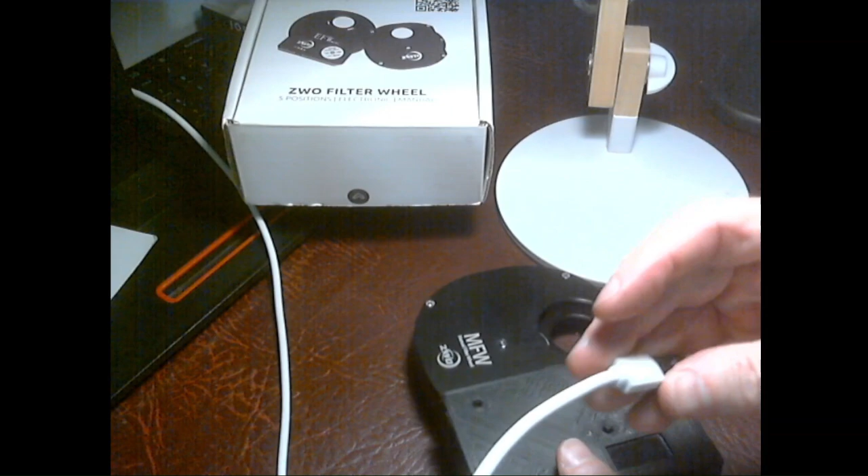So without connecting it to ASCOM, we're just going to stick a 5-volt supply in there, and what it will do is it will go into calibration mode in the first instance, locate that magnet, rotate 360 degrees round the wheel to work out how many steps there are in a revolution, and then go to a filter position. So if I plug that in, you'll see it immediately says finding magnet, and the wheel starts rotating.

And we should see here the magnet coming into view any second now. There it is. So there's the magnet, and this will find the magnet. Oh, it's already found it, sorry, but it's finding it again to calculate the steps per revolution, and then going back into the filter wheel position.

Once it's done that, we can just press one of these buttons, and you can see at the moment it says parked filter 4, brackets 4. So that's saying that it's in position 4, that's the bracket 4, and that filter is called filter 4, rather dully. And then we can press the minus to go back, so filter 4 to filter 3. We're now in position 3 on filter 3. Or we can go plus and go back to filter 4, and so forth.

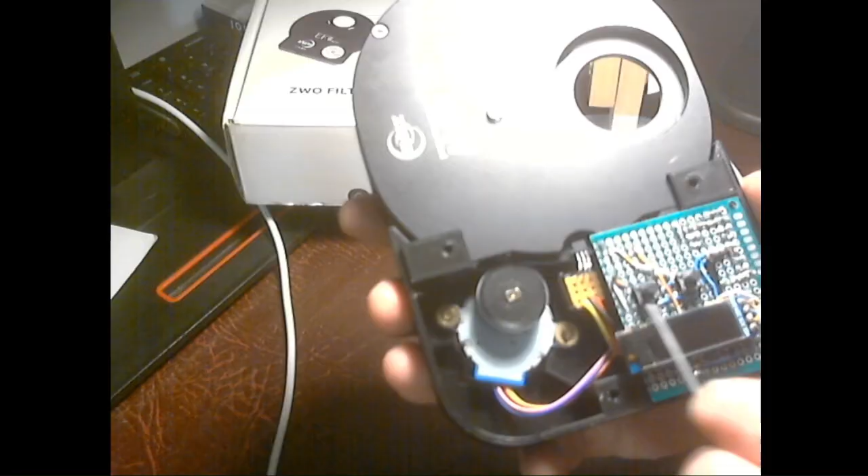and then if we take that off, you can now see the components inside. So you've got the stepper motor here, you've got a 3D printed driver wheel on there, and on that wheel there's a rubber band. I just happen to have a suitable rubber band in a drawer. My partner saves every rubber band we get from parcels, and lucky she does, because that was perfect.

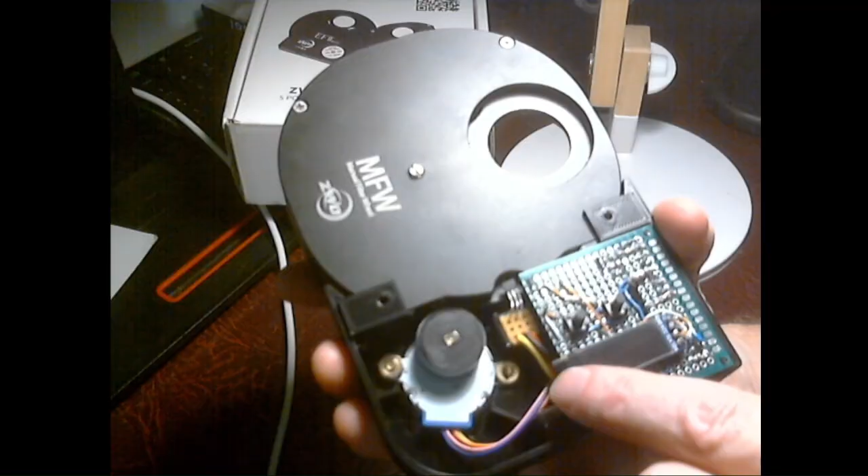And we've got the circuit board here on a little bit of donut board, I think they call that, with the OLED screen. I've kept the information on the LED screen pretty basic, large font. This is your filter. You're on. This is where you're moving to and from. That's the way I like it, because it's nice and simple, easy to see. And what else do you need from a filter wheel? And then you've got buttons here, obviously, to go left and right that we were using before.

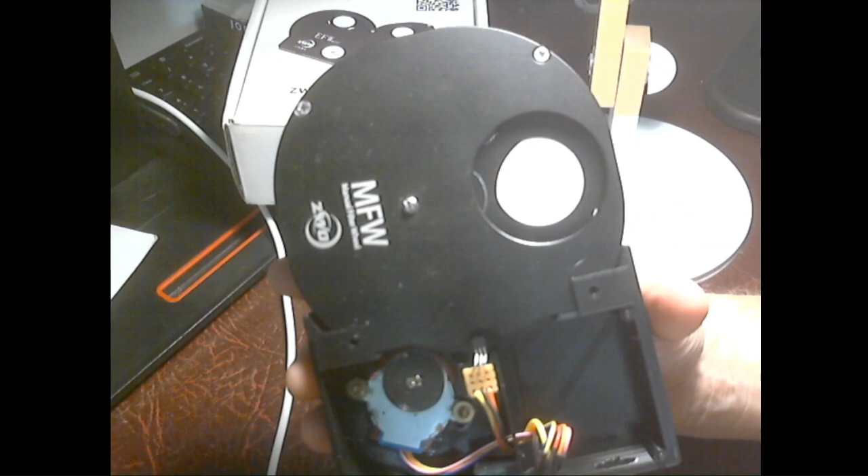That just sits on the top there, and you can see underneath we've got the cables going through to the stepper motor and to this Hall effect sensor here, which is the component that's detecting this neodymium magnet. I drilled a hole in the side, as it was the same design as the one that's already up on YouTube with a little magnet on the side.

I recently bought a bunch of tools from an auction site, and amongst those were some center drills, which are kind of big, thick drills, and they're perfect for this. They drilled a really nice, neat hole for that magnet.

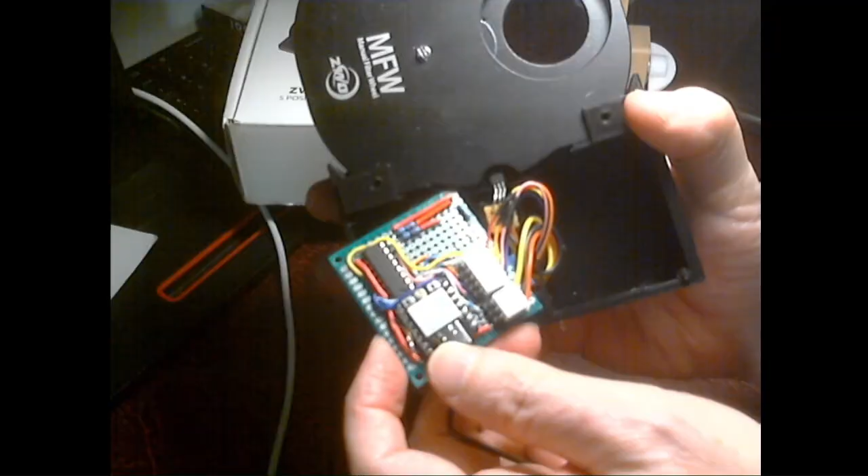Right, and then on the back of the board, you can see it there. You've got this microcontroller here. I don't know if you're going to be able to see that. It's a Seeeduino XIAO controller, and it's an Arduino type controller.

And then we've got the stepper motor driver integrated circuit there, and not much else really. A few resistors. I think there's a small capacitor there somewhere as well, and yeah, it's a pretty straightforward circuit, and I'll describe the circuit next up, and I'll take you through the 3D printed components.

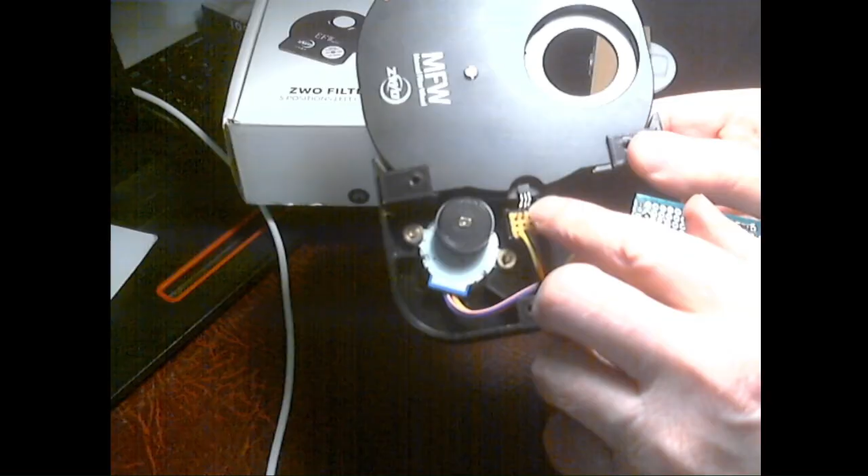So if we just plug that in again, you'll get a view of what's going on from the inside, so to speak. And here we go. So it's rotating around. This Hall effect sensor is looking for the magnet. And you can see it's finding magnet at the moment. Here comes the magnet now. And as soon as it goes past that magnet, you can see it's now changed to calculating steps per revolution. So we're looking for the magnet again.

I might just do a little change to the script to calibrate in both directions, which I think the original project had, just in case there's a slight difference. I'm not sure if I detect a little bit of creep in one direction if you go step to step and just keep going in that direction.

But we do take the opportunity here, whenever this magnet goes past the Hall sensor, no matter how long you've been using it, from one filter to the other, to recalibrate it, because we now know in relation to everything else where that magnet is on the wheel. And if it goes past the magnet and it thinks it's at position 10, when it knows the magnet's at position 0, it'll reset itself to position 0. So it will recalibrate.

And another little tweak I might do is to say, okay, let's do a maximum of five moves between filters without going past the magnet. Of course you might go past the magnet anyway, in which case that's fine, it resets your count. But if you're on your fourth move and you still haven't gone back past the magnet, maybe on the fifth one, force it to go past the magnet, even if that's the longer way to the filter, to make sure that it gets recalibrated every now and again.

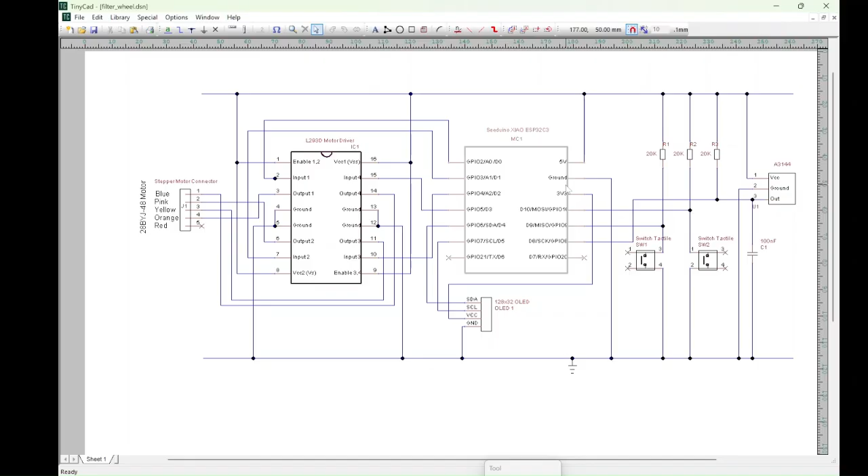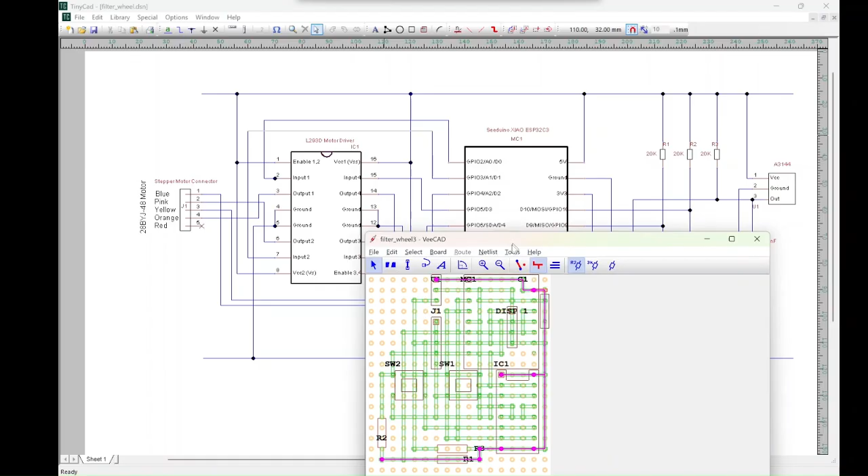So here are the ground connections. And if we look at this one, that's the 5 volt supply, and you can use this to see how things are connected up. I'll include it, but just be very careful how you use this so you really understand, when you're wiring up on the board, how it relates to this circuit diagram here. It's a fairly simple circuit, so as you're putting things on the board, you should be able to see fairly clearly what needs to be connected up.

That's about it. I mean, just to be clear on the driver, whenever one of these pins is high, say input 3 here, set that high, it means that we then take the voltage from VCC2, and it's output through 3. So input 3 high, then output 3 is high.

But it could be at a higher voltage. These things are designed to, say, take a signal voltage of 3.3 volts, and it could be 12 volts being supplied through VCC2. In our case, it's 5.

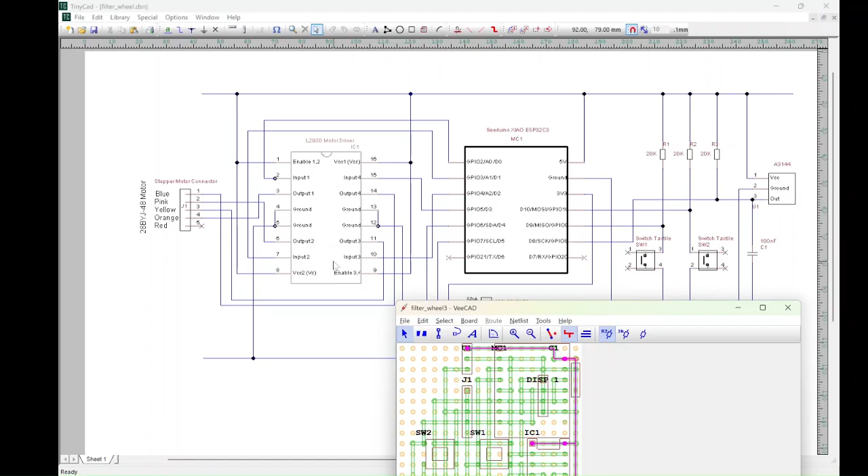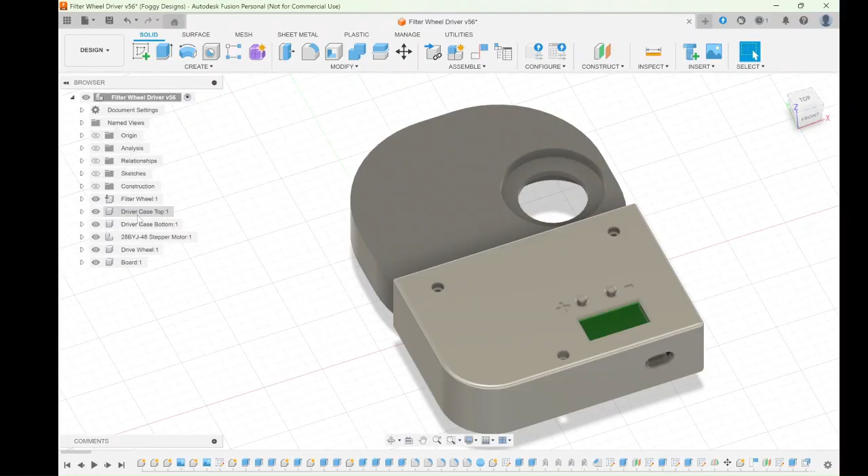So what I did to begin with is to mock up the filter wheel itself. So if I take out all these other components, you can see here I've got the filter wheel at roughly the right dimension. I've got as good as I could get. Most importantly, these holes here are the right distance apart, and the wheel here is the right distance. So I could start to build everything around this.

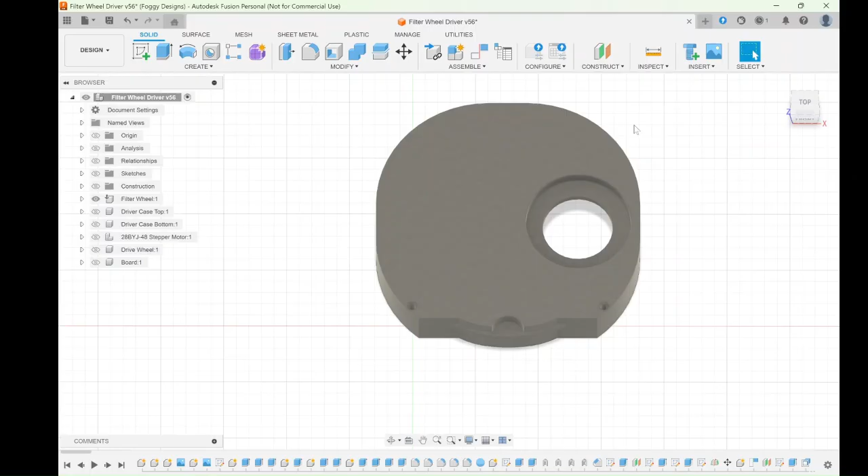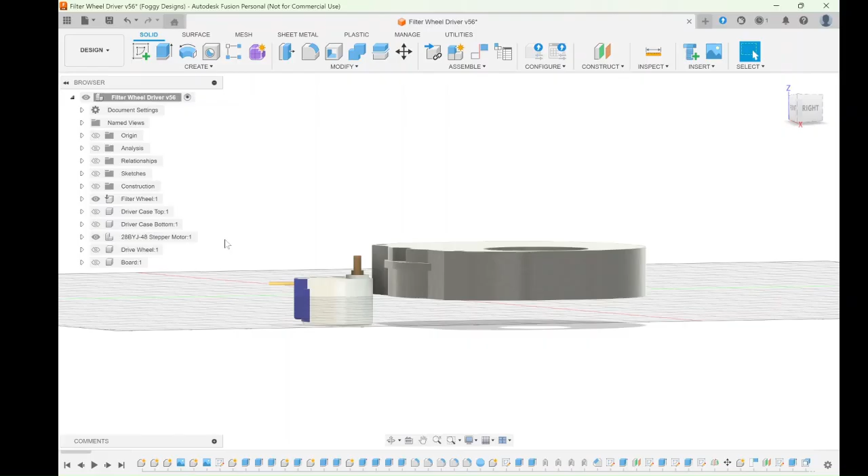I looked on the public sites for Fusion 360 objects and came across the model for the 28BYJ-48 stepper motor, so I didn't have to do that. I just imported it, and I positioned that in the right place, so that when we put a little wheel on top of that stepper motor, which we will print, where's the wheel? Here we go. The wheel now is coming up against the wheel of the filter wheel.

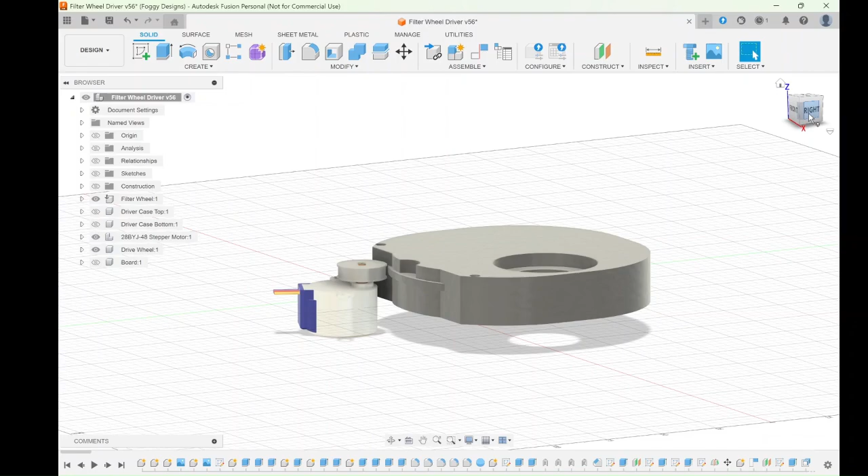There'll be a rubber band around this driver wheel here, and then that in turn will be mounted on the bottom of the box, which is the main component. So if I put that bottom of the case in, let's bring this up. You can see that the stepper motor sits on a couple of platforms there. There's a bolt that goes through this section here, and then there's a slot here, so you can just move that wheel in and out to get the right pressure against the filter wheel to drive it.

There's a platform here to hold the Hall sensor. I've got a little tiny Veroboard, so it sits on this ledge, and there's a little bit of a cutaway beneath it to accommodate the solder blobs on the bottom and the cut-off wires. And then the board itself sits on the top here.

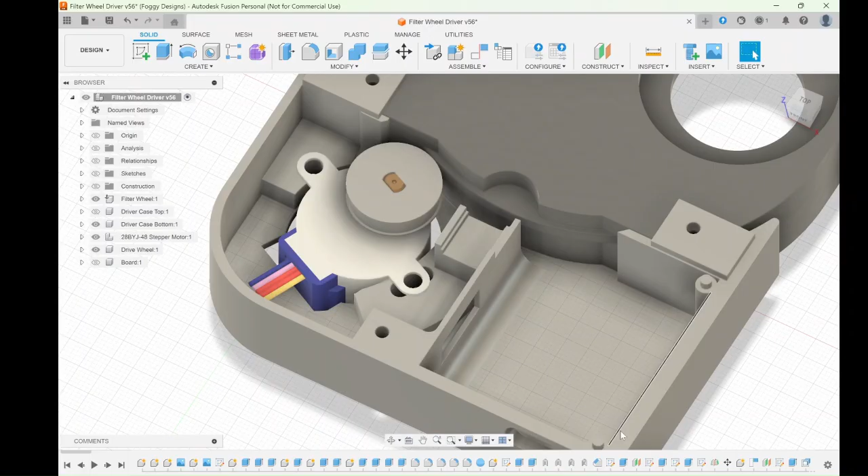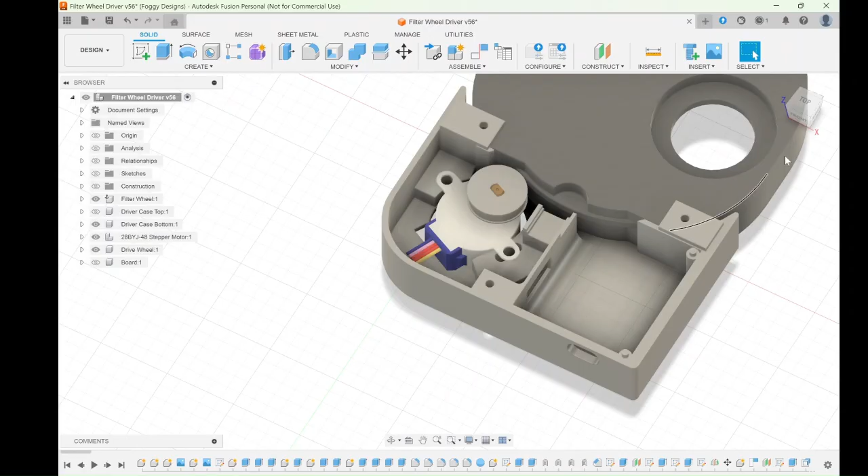They've got a couple of lugs that fit through the holes in the donut board, and you can see the whole thing is secured on the filter wheel via these tabs which go across the top, through which you'll put screws directly into the filter wheel, and on the bottom it overlaps the filter wheel there.

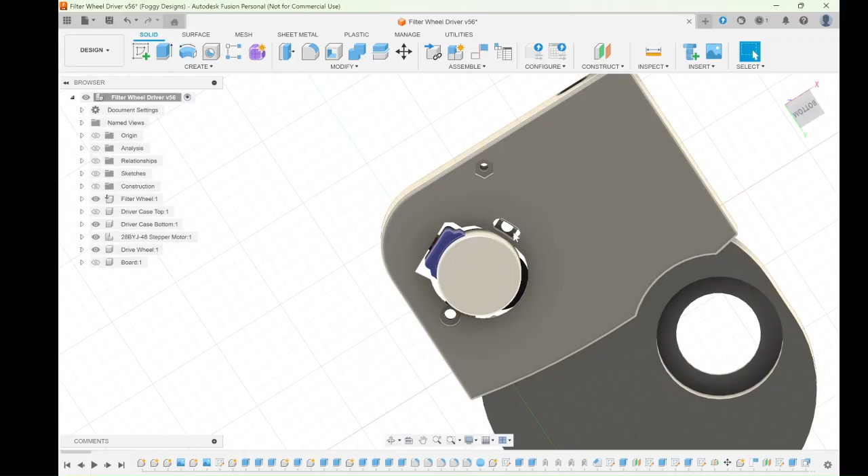And there you can see where the bolts come through the bottom of the case. I recessed the hole for the bolt here to take the head of the bolt, but I didn't here because it was a slot. If I put a recess, it was quite a big cutaway, so I left that so the head of that bolt will protrude, but the whole stepper motor protrudes anyway. So that's the bottom of the case.

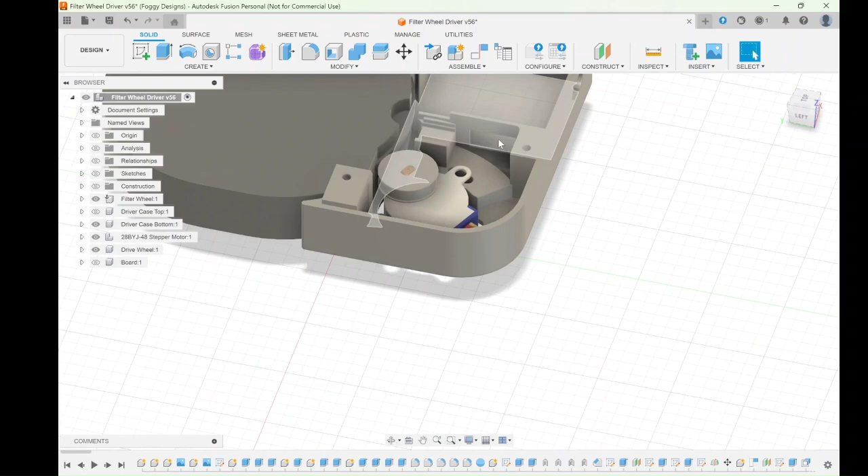There's a hole there for the USB cable to plug in. There's a window there through the side of this wall for the cables to come through for the stepper motor and the Hall effect sensor. And then we have the board which sits on top. So I've got a mock-up of that. You can see the buttons there on the screen. And that just sits on top, and as you can see, the lugs from that bottom of the case just fit through the board there.

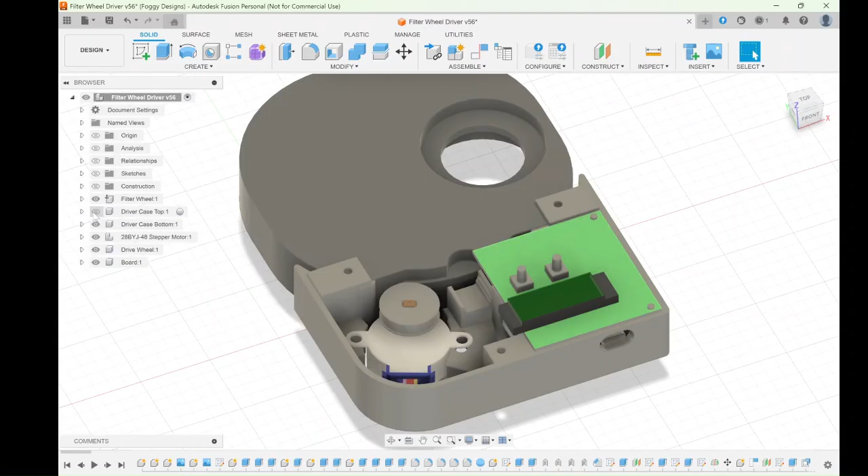And then on top of that, we then have a driver case top, and that just fits on there. And then we've got the bolts which will go through the top of the case, through the lugs on the bottom of the case, and then screw into the filter wheel.

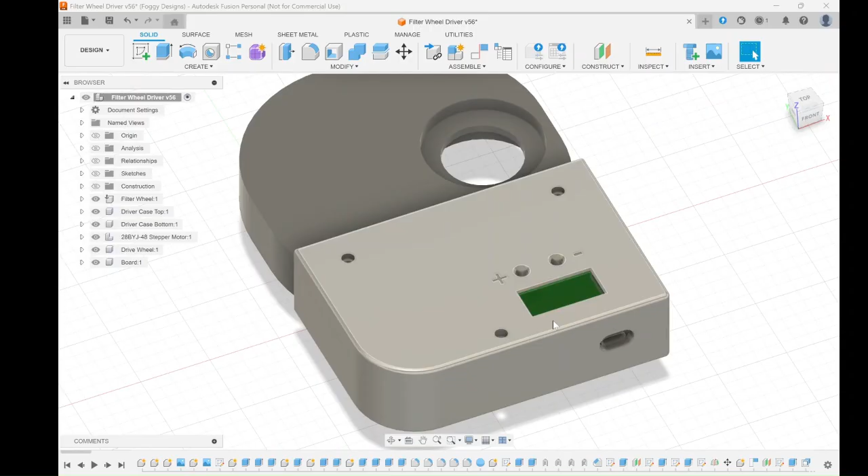And then there's another bolt which goes through here just to secure the bottom and top of the case. And you've got the window for the OLED and the two holes there for the buttons. And that's it. So as I say, I'll put the Fusion 360 export files up on GitHub, and I'll also put the STL files for the components that you need to print, which are the top of the case, bottom of the case, and the wheel that sits on the stepper motor.

As I say, that fits the board that I put together for this. It may not fit yours, so you may want to come in and tweak this a bit, or try and get the board exactly the same dimensions as mine.

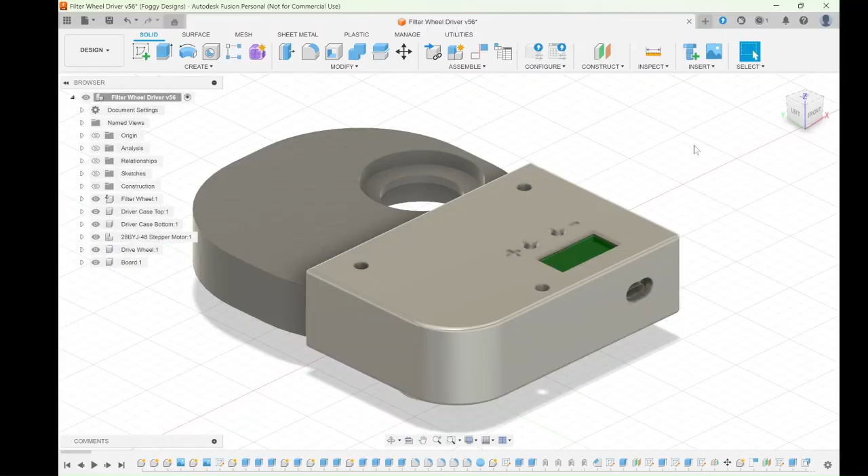Okay, we're going to talk about the software used to drive the filter wheel and to implement the ASCOM driver so that we can then manipulate this filter wheel via astronomy software that's ASCOM compliant. The hardware itself is driven by an Arduino script. I use the Arduino IDE here. There are other options available.

There's a Visual Studio extension which I did download and install, but it took me so long to get round to having a play with it that I found the trial period had run out. So I can't really say how good that is. And to be honest, for what I use it for, I suspect the Arduino IDE is enough. There's also a product called PlatformIO, which you can use with VS Code.

I've uploaded 3 different scripts. There's a tester 2, who knows what happened to tester 1. There's a magnet locator and the main driver itself. So tester 2 will just drive the stepper motor a bit backwards and forwards, use the buttons, will detect a magnet with the Hall effect sensor and print a message to the screen. And it's really just to test that you've got things wired up correctly. Even if it's just on the breadboard, you can use the tester 2 script just to test for the basic functionality.

One of the things I really had a bit of a job getting right was the driving of the stepper motor, and that will test that part of the development. And then there's a second script called FW Magnet Offset Calibrator.

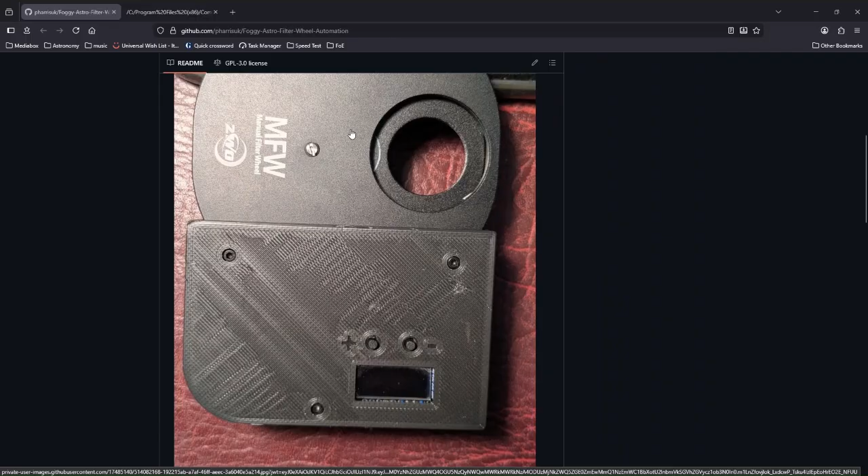As I say, when you install the driver, it will point you to the GitHub site, and this is where I've uploaded all the files for this project. So we've got the main project here, which has got the design for the case. It's got the circuit diagram here. We've got files for TinyCAD and a netlist and VeeCAD layout, which is a little tricky to use. We've got the main components used in that circuit, and then we've got the Fusion 360 design.

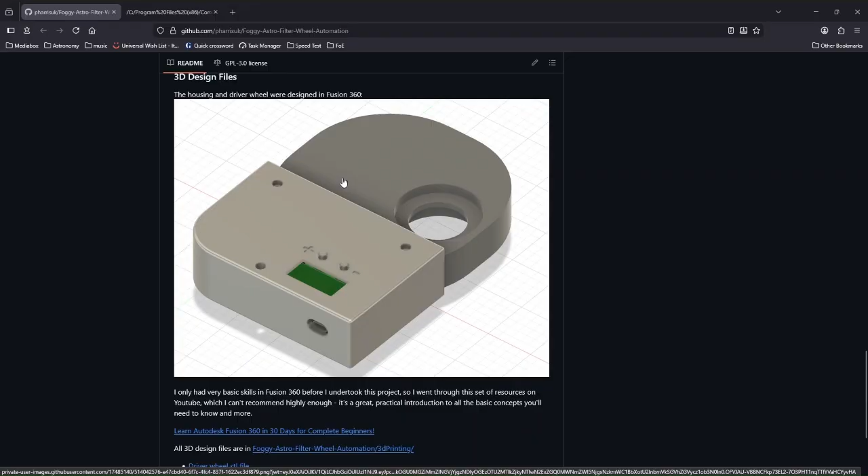But we've got the STL files if you just want to print those out, and they're suitable for the board that you're installing. And then we've also got the Fusion 360 export should you want to go in and alter that Fusion 360 design yourself. Inevitably, when I finished that design, there was a fair bit of tweaking at the end. I just kind of pushed this wall this way a bit, or moved this slightly to the side. So there's quite a few little tweaks at the end of that design. And then you've got a link to another project.

Now, this is the Visual Studio project. I used the GitHub interface in Visual Studio to save this repo. So you can load this straight into Visual Studio. It's got all the stuff for the ASCOM driver itself, and it's got these two extra directories where we've got the Arduino scripts, the filter wheel firmware, and we've got the Inno installer here in this one. But if you take the view in Visual Studio of just the project, you won't see those. So I'm in the Solution Explorer, and you won't see them. It's only if you go to folder view that you can see those additional folders.

But what it does mean is that if I alter anything in the Arduino firmware or the installer, it gets picked up by GitHub in Visual Studio. Just makes my life a little bit easier doing it that way. And that's it. I hope that if you are considering converting one of these filter wheels from manual to electronic, this will give you something to go on. I took my inspiration from that YouTube video. This is my interpretation of it, and I hope that the files that are provided here will give you a starting point at least if you want to do the same thing yourself.